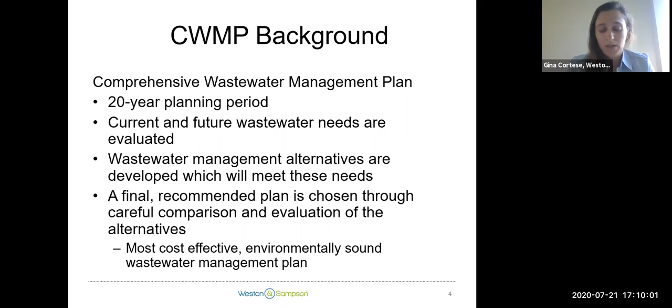We started by looking at what exactly is the wastewater system currently in Bridgewater. The town currently has about 2,300 sewered properties. The network itself is aging, almost 100 years old. Like most towns in Massachusetts, the collection system is subject to flows that aren't strictly sewer - rainwater, cracks in pipes, and other illicit connections that create extraneous flows within the system.

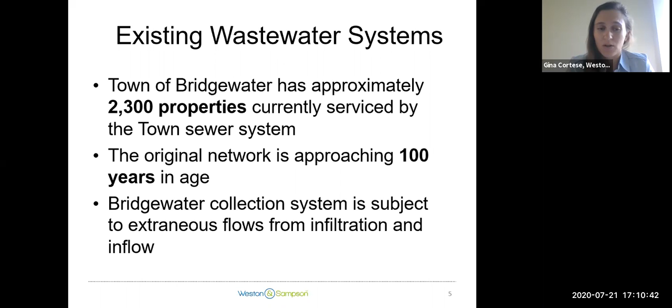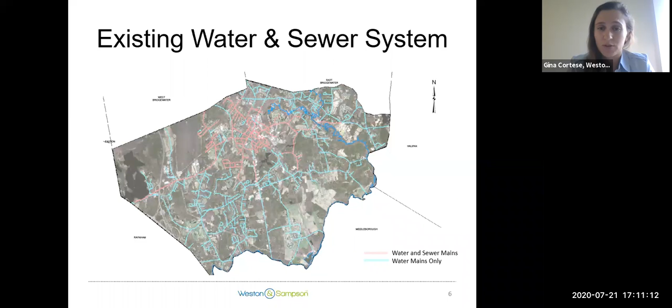What does that look like on a map? It's a bit difficult to see, but this is a map of Bridgewater - in pink you'll see areas with both water and sewer currently, and in blue, areas served just by water. You can see there's a fairly sizeable portion of town that only receives water, meaning they're not connected to sewer, and they have some version of an on-site system to treat their wastewater.

When we look at the fact that a large portion of the town is unsewered, we generally like to try to see if we can bring those areas onto sewer, and if that's something that is even necessary.

Looking back at prior planning efforts for the town of Bridgewater, 8 needs areas, or neighborhoods, have been identified as possibly being in need of being connected to sewer: Hayward Street area, Whitman Street, Lakeside Drive, Goodwater Way, Norlen Park, Dundee Drive, Atkinson, and Bayberry Circle. These 8 areas were where we focused our initial evaluation on determining whether or not they were in need of some change to the way they're currently treating wastewater, which is currently using on-site systems.

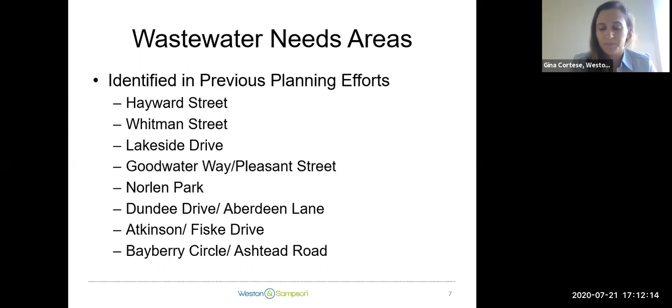Bear with me with the map - it's a little busy, but the streets highlighted in orange are those where sewer is available, and yellow shows parcels that are connected to sewer. In the red and gray areas, mostly red, those are where the 8 needs areas are listed within the town. There's a couple to the northeast portion of town, and then the majority are to the west and southwest.

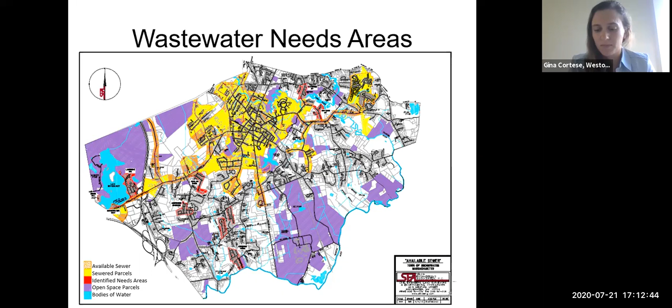Looking at these needs areas, we then went ahead and tried to propose some solutions. And in proposing those solutions, we did a brief analysis of which of those solutions make the most sense.

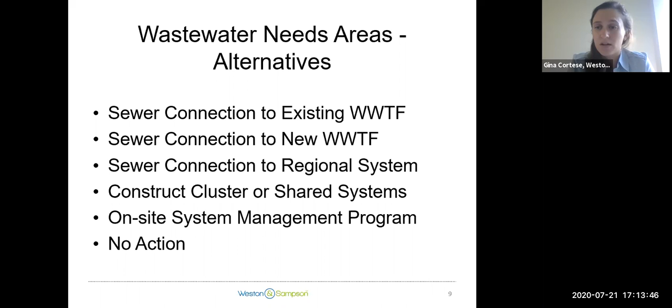The things we looked at included connecting those needs areas to sewer and sending that sewer to the existing wastewater treatment facility, connecting it and perhaps sending it to a new wastewater treatment facility, perhaps to a regional system composed of systems brought together from Bridgewater and surrounding communities, potentially constructing cluster or shared systems within those neighborhoods, perhaps reevaluating and changing some on-site system management programs, or possibly even taking no action if there was no immediate or driving need to connect to sewer presently.

We'll talk more later about those needs areas, but just like we evaluate the needs areas for properties in town, we also evaluate the needs areas at the existing wastewater treatment facility in Bridgewater.

So the three main drivers for changes at the wastewater treatment plant in Bridgewater: one is to meet capacity needs, to make sure they can handle the volume of flow sent in from all over town, from those potential needs areas but also from existing sewered areas. Another, as Michael mentioned in his introduction, is to meet discharge limits determined by the NPDES, National Pollutant Discharge Elimination System permit - that's what the town uses to send their discharge to the town river. And then, like most upgrade projects, we're looking at the actual facilities and systems at the wastewater treatment facility to see if they need to be modernized in order to restore useful service of the equipment currently on site.

So specifically, when we look at the capacity in terms of whether or not there's going to be a need for increased capacity at Bridgewater, we start with looking at what the current flows are to the site. Essentially look at what the existing flows are from the typical neighborhood sewered parcels, but then also looking at existing flow contributed from Bridgewater State University. That together makes up about 1 million gallons.

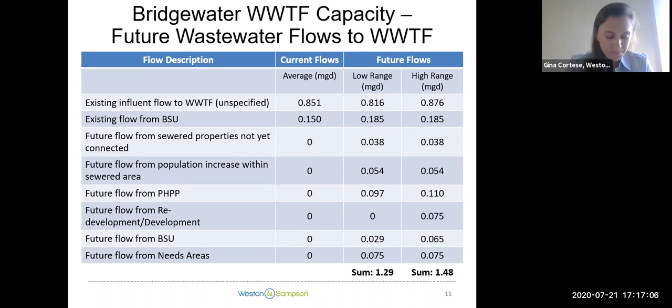The second main driver of potential changes at the wastewater treatment site is looking at capacity increases. We then came up with a list of potential alternatives like we did for the needs areas. So what changes could we possibly make to be able to increase capacity?

We looked at potentially discharging to surface waters, adding groundwater discharge at the site or adjacent to it, potentially reusing water that has been treated at the site, as well as partnering opportunities with private developments and potentially the MCI Bridgewater site.

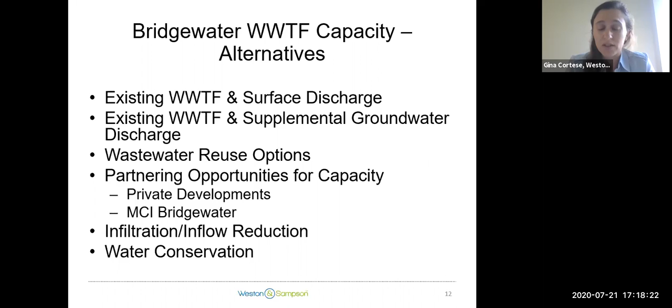Like I mentioned earlier, that inflow and infiltration, which is flow that gets into the wastewater treatment collection system that's not sewer, that comes in from rain, that comes in from illegal connections. So there's always an effort to try to reduce those flows coming into the system, as well as trying to conserve water upstream and having less water go down the drains, if you will.

If you look at the changing permit conditions at the site, this is a major driver for potential changes at the treatment facility. You can see on this chart a few discharge parameters that are listed, as well as what the permit limits used to be, what they currently are, and what they'll be for the foreseeable future. There are changes. The NPDES discharge permit is what allows the wastewater treatment facility to discharge their treated water into the Town River. In order for them to continue to discharge that treated water, they have to be able to meet these permit requirements.

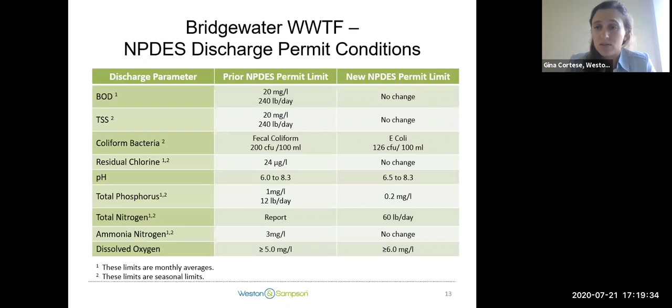So I'll draw your attention towards the bottom. The main changes that we focused in on are nutrients, so that's looking at total phosphorus and total nitrogen. You can see from the prior permit limits to the new permit limits, they've decreased, so it's a little bit more stringent. In order for the treatment facility to meet these new requirements, there will need to be changes in the process.

So like we did for all of the other needs, we looked at potential alternatives to try to meet these new nutrient limits. In doing that, we screened a fair number of technologies. But when going through those technologies, there were a few key considerations in terms of which alternatives to move forward with for more detailed evaluation: process reliability and whether they will truly reduce the nutrient loading to meet the new permit requirements, whether it's feasible to actually construct those new technologies and their operability, cost effectiveness, and the ability to protect the quality of the current solid waste biosolids that come off the process.

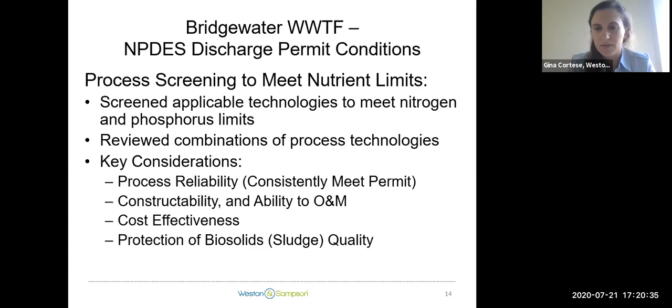We won't get into too much detail on this slide, but we were able to narrow our alternatives for treatment at the wastewater facility down to three main treatment options that we further evaluated in more detail. All three were determined based on their ability to meet the nutrient removal requirements from the new NPDES permit.

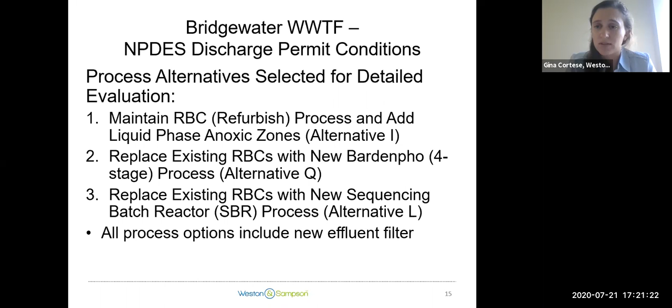They all involve either maintaining the current process but adding some tankage and treatment capacity, or replacing the existing process and changing the staging and treatment train of what's currently there.

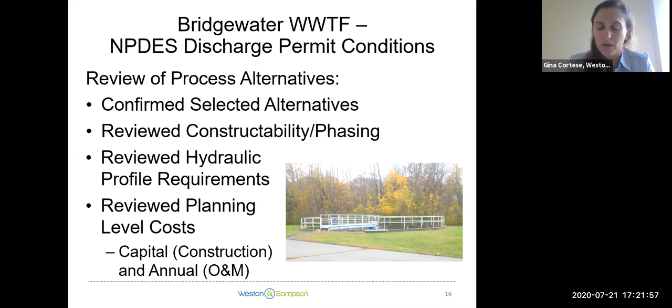So in looking at those treatment processes we would move forward with, we continued to evaluate which was most constructible, how easy it would be to phase construction at the current wastewater treatment facility site. We reviewed hydraulic profile requirements and general planning-level costs in order to evaluate the best alternative to move forward with in designing new treatment processes at the site.

With that evaluation, we were able to come up with a recommended plan of changes to be made. There's a fair number of modifications here, many of which involve rehabbing the current treatment process that's there now.

This includes rehabilitating secondary clarifiers, rehabilitating solids dewatering processes, rehabilitating and modifying existing structures on site, but there's also a need to add new treatment structures and processes, such as new primary clarifiers, new structures around the biological process at the RBCs—rotating biological contactors we have on site—and other rehabilitation like the site buildings and ancillary improvements.

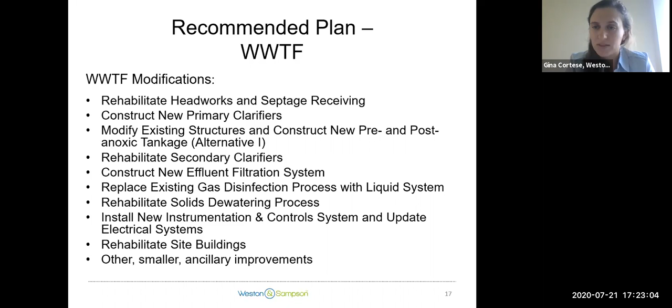Once we had that in mind, we of course had to look at the site itself. It's a little bit constrained. So not only did we have to look at what processes would make sense in a design to meet discharge requirements, but what we could feasibly put on the current wastewater treatment site in terms of staging.

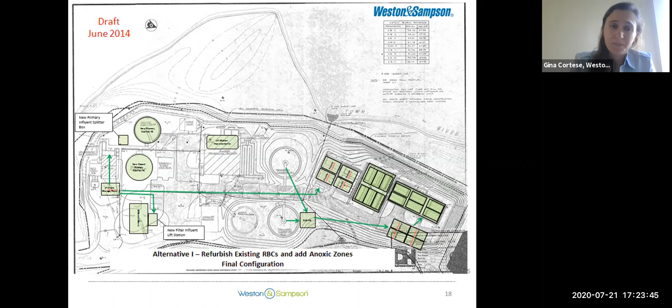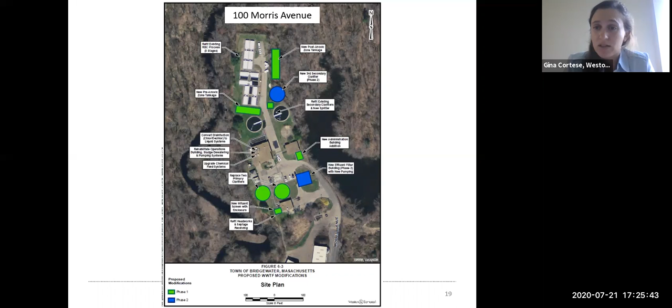There's plenty more to talk about in terms of the design of the site and how the process is implemented there. Any questions we can certainly answer, but for this presentation we'll move on, noting that the highlighted squares and circles are where the recommended changes would be made on site.

That closes out what we're talking about at the wastewater treatment facility. Thinking back to the needs areas for connecting new properties to sewer, we had those 8 areas at the beginning. On the map here, highlighted in blue is where the wastewater treatment facility is on Morris Avenue, and the pink areas show the needs areas evaluated as in need of connecting to sewer.

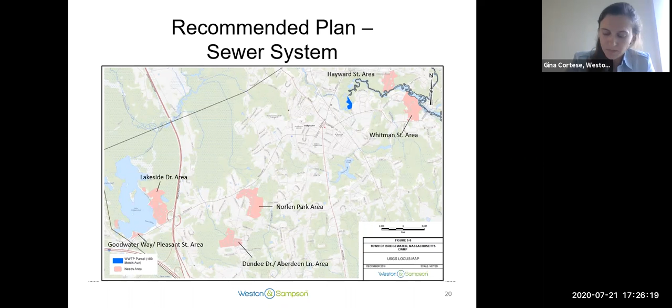So we had started with eight needs areas that had been identified at prior planning efforts. And as we went through those 8, we made evaluations based on a number of factors.

You can see cost on the screen here, but we also wanted to consider the level of need of each of these areas in terms of discharge to the environment, the level of need, and discussions that had been had with the actual communities in the needs areas, and a whole slew of other factors, which led us to determine that 6 of those needs areas that had been previously identified were in true need of being connected to the sewer, which would require sewer extensions, and those are the costs that you see on the screen now.

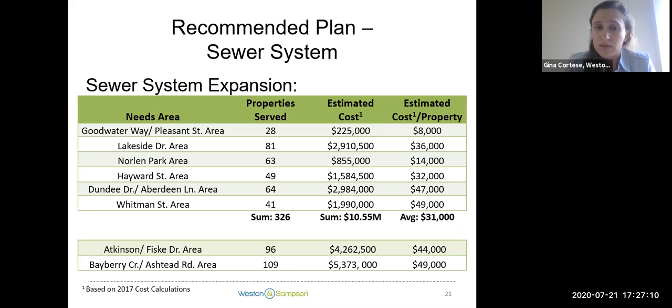In terms of the big overarching picture of what's recommended as part of this comprehensive wastewater management plan for the town, the main feature here that we'll continue talking about are those upgrades to the actual treatment facility. So the modified and additional equipment that need to be built there, as well as installing new instrumentation and updating some of those buildings. That's something driven by those new permit requirements, and those needs are fairly immediate.

Moving forward and looking at the cost of the project that's being recommended, there's a $31.2 million approximate cost associated with that, and again, those needs are fairly pressing.

When we think about the sewer system expansion, those 6 areas highlighted on the last slide have been evaluated as needing new sewer in the future. What's not clear is how soon that future is for those areas. It'll be dictated by when the need comes up, as the neighborhoods themselves start having failing systems, or there's a clear need - that's when the evaluation of those sewer system expansions will come into play.

So for now, we'll focus the rest of the presentation on those pressing wastewater treatment facility upgrades. As we talk about that, we're looking at that 31.2 million cost.

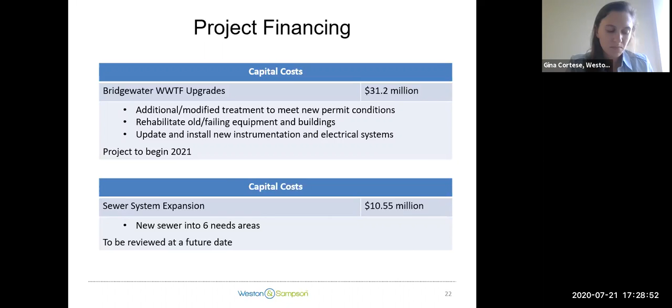As far as how to pay for that, there are obviously multiple options to look at. Michael had mentioned state revolving fund financing that's available for projects that have gone through this comprehensive wastewater management plan process. There's the potential to have favorable financing through the state from that fund, and in addition to lower interest rates on that loan, they also offer potentially principal forgiveness from the state revolving fund. And then there's DCAM options for possible funding sources as well.

Those are 3 options. There's also the possibility of increasing sewer rates.

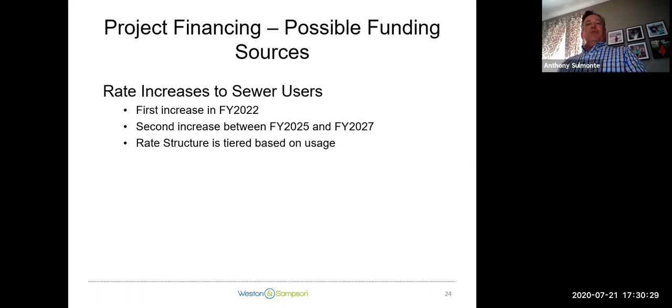And for that, I will turn it over to Anthony Sulmonte, the Finance Director, who I think might still be muted. Not sure if that's something I can do. Michael, that might be something you have to do. I know I can ask to unmute, but... Sure, let me - oh, there you go, whoops, okay, there we go, sorry. I finally found the button and I went to unmute, and then we were in contradiction of one another.

Thank you very much, Gina. So as Gina alluded to, there's 4 components to financing: what we're going to be able to borrow at low interest with state revolving, what we would receive potentially as principal forgiveness, and another funding source is the Division of Capital Asset Management and Maintenance. That's the state, and that would correlate to Bridgewater University, whether or not we would be able to obtain some funds from them.

So as I go through this, what I'm going to cover is the impact that the user rates could see depending upon the financing options shown in the slide before: state revolving, depending upon what funding we are able to achieve from the state revolving, principal forgiveness, and the Division of Capital Asset Management. So as I go through the next few slides, we'll refer to having a minimum impact, a moderate impact, or a maximum impact, and that's all depending upon those other 3 funding sources.

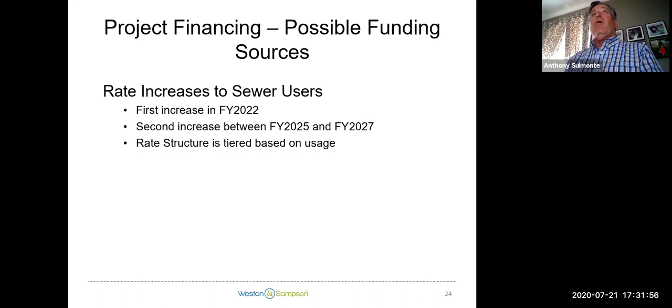Next slide. So it's important to note, as it relates to user charges for discharging waste to the sewer system, that the town of Bridgewater has a tiered system. The rates they charge are dependent upon the amount of discharge per quarter that are recorded on the bill, and in fact billed to the residents. Tier 1 is the lowest rate, and you'll see the rates currently in effect when we go to the next slide. Tier 2 has a higher rate, and Tier 3 has a higher rate than Tier 2 or 1.

So in Tier 1, in our study, we showed what that means is on their typical quarterly bill, they would see less than 1,500 cubic feet, which is part of the mathematical equation per quarter.

And that number there then is multiplied times your tier 1 rate, and that would be what your bill would equate to for the discharge portion of the bill.

30% of the users are in tier 2, the medium residential, typically averaging between 1,501 to 3,000 cubic feet per quarter. Tier 3 is 16%, multifamily, residential, commercial, institutional, and so forth. Their bill would typically show greater than 3,001 plus cubic feet per quarter.

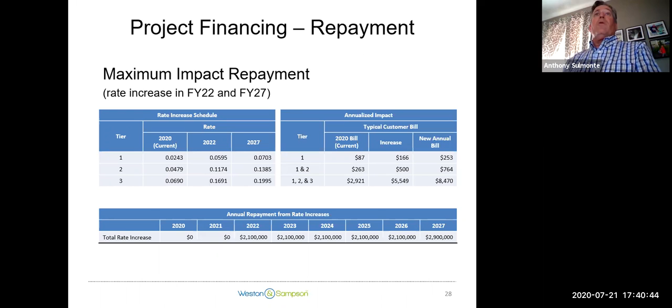We can move to the next schedule, which gives you, I think, a context. I mentioned earlier those users that are in the 3,001 plus cubic feet, which we labeled here on the right where it says 1, 2, and 3. So if we look at the current bill, averaging typical bill 2,921, under the new minimum the average bill, we're talking

6,754. And the new moderate, 6,905, and then in the new max, 8,470. So this depicts that those users in the high usage category, that's where, as I referenced, 80% of the revenue is generated.

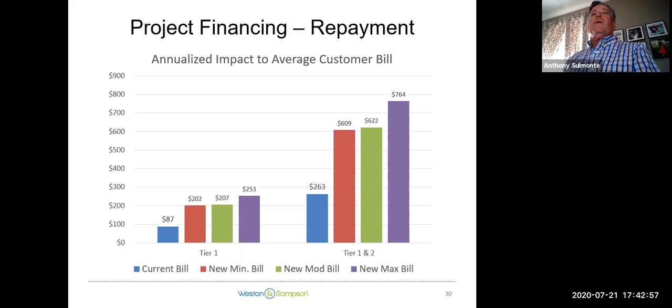So there's the annualized impact of the bill. Just another way of depicting the impact on the bill itself for tier 1, 2 and just tier 1. We took out tier 1, 2, and 3 so that this could be more easily read by those in attendance today, so it's clearer as it points to the increase in the average customer bill. We'll move to the next slide.

Great, thanks Anthony. Gina, you're welcome.